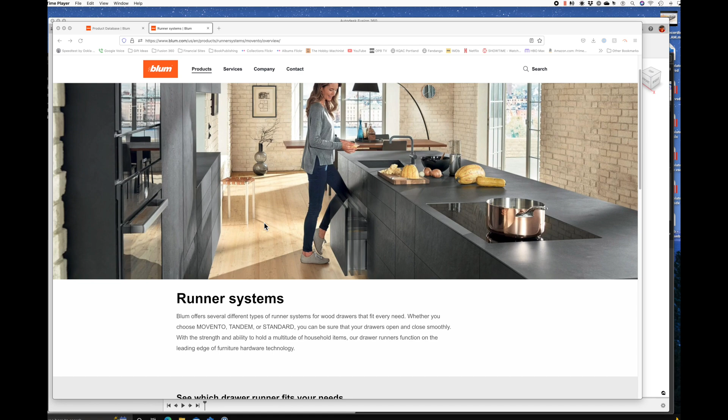Anyway, so let's see what we got here. We're at the Blum website. Let's see if we can find some models for what they call their runner systems. I think we'll concentrate on the Movento system.

So let's go to Services, e-services. They do bury this down in their website. Product database, start the database. Okay, if you don't already have registration with Blum, you're going to have to create one here. It's pretty straightforward. I have an account with them, so let me log in here.

And there we are. Okay, we got scheduled maintenance - that's a ways away. Product database. Here we go. They don't call them drawer slides, they call them runners. Pretty bougie, I guess. There's our Movento. And there's our runner.

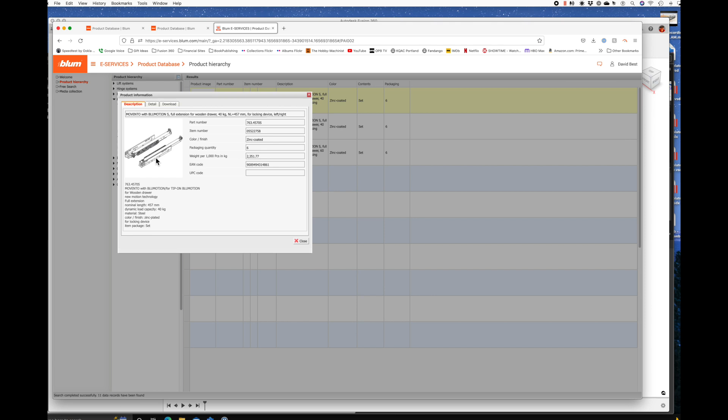And let's put in, there's our 18-inch versions. So we've got a few types here. This is 40 kg full extension. All right, so I'm pretty sure the differences here are the thickness of the drawer box sides. Let's just pick this one here. I've used this before. Okay, that's the runner we want.

Here's the download file. Okay, so there's the CAD stuff. Let's scroll down here and see if we've got STE - that's a step file. We'll download that.

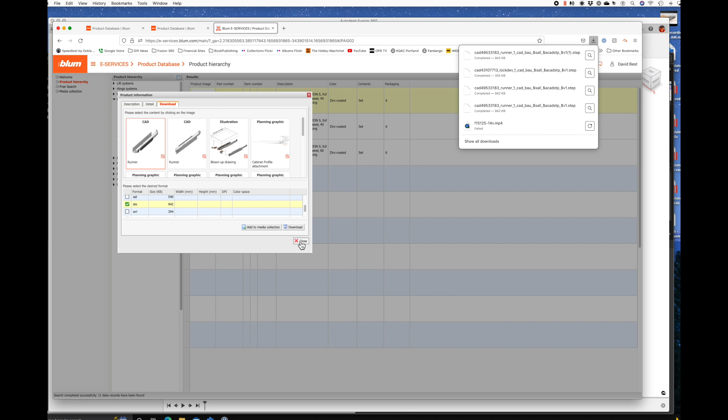And let's close this. We'll go to the download folder and open that from Fusion. So here we're back in Fusion, file open. So we'll go open from my computer, downloads. There it is.

Well, that's interesting. Let's see what we've got here. We've got a solid model. What do we got here for components? We've got two bodies. Is there more than one body in each of those? No. So there's two components with a body in each. Let's see what they are.

Let's turn one off. Okay, that's the runner. And this other piece is, oh, that's the Movento soft close mechanism.

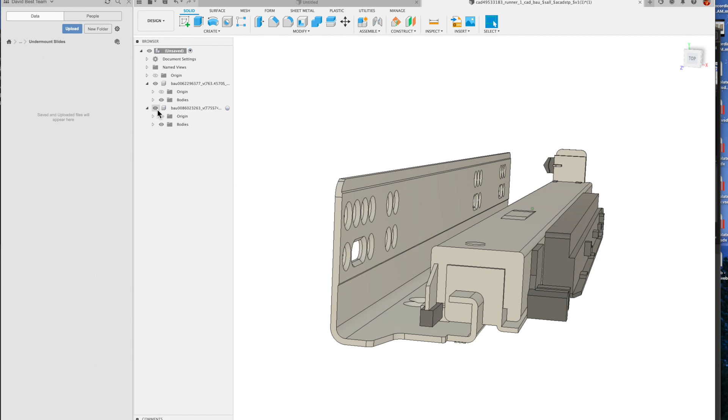So we've got something here. Let's look a little closer. This is, of course, the rail that attaches to the side of the cabinet. This is the back because there's the little tab that sticks in the hole that you have to drill in the back of your drawer box. What we don't have here is the clip that attaches this to the drawer. So we'll have to go back and get that.

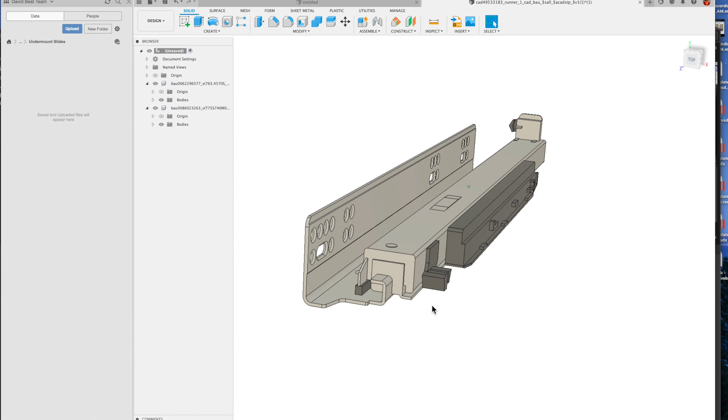Let's close this. But notice something here - they've given us kind of a brick of a model. There aren't any functional components here. I guess Blum must be worried that somebody's going to take a truly accurate 3D model and rip them off or something.

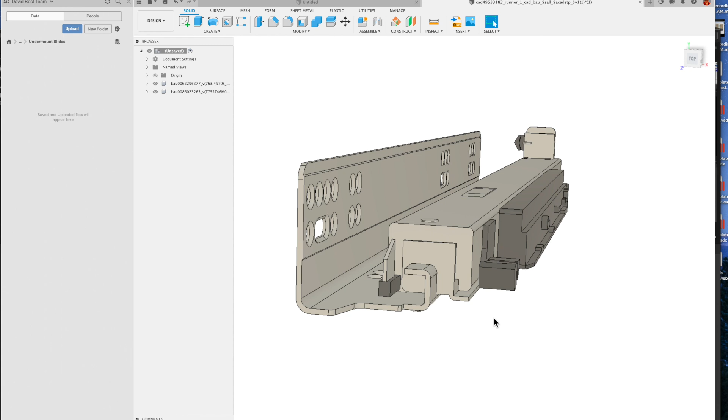But there's at least enough here to build this into a 3D model of a cabinet that uses it. It won't move, it's going to be static, but at least you can get the placement and see it in the model. Let's go back to Blum and see if we can't find the attachment clip that goes along with this.

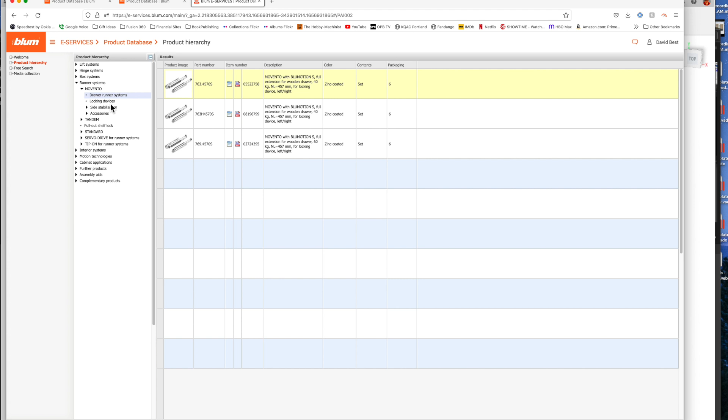So locking device, that's what they call them. There's one there. This is the fancy version that's got 8-way adjustability. What do we got here for downloads? So if we go under the CAD tab, we can scroll down. There's our step file. Let's download that. Okay, that's come in.

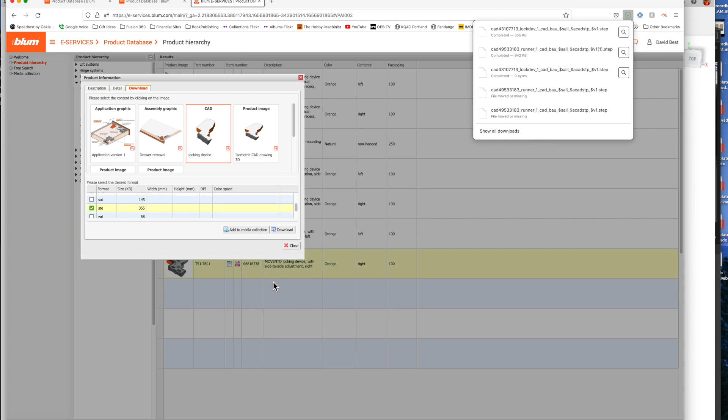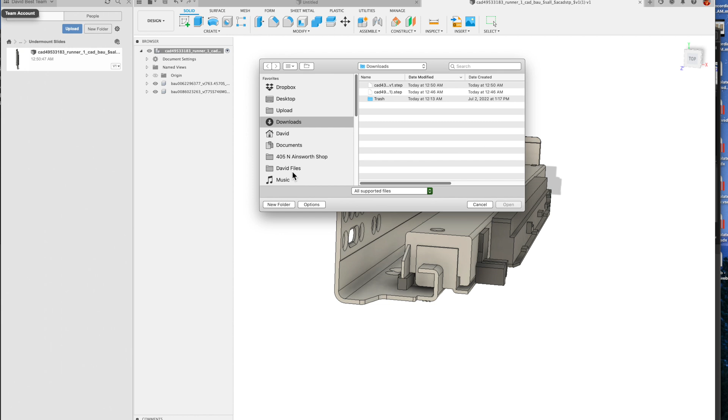Now we can't pull that directly in here. Let's save this first. Okay, that's going off into our Undermount Slides project in the cloud. Now we can open from the downloads folder again. There we go. Woo.

Okay, well it kind of looks like a clip. Not much to it. It's another kind of brick model. So let's save this.

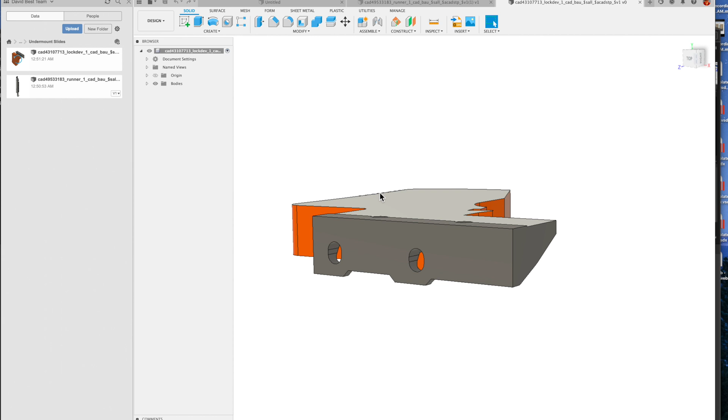Now we've got it over here, and we can import that into this. Let's do that now, let's just bring that in. Insert into current design.

Wait a minute. Oh, I see, I picked the wrong one here. Insert into current design. All right, there it is. I'm not going to pay any attention to that right now. Let's just see what we got.

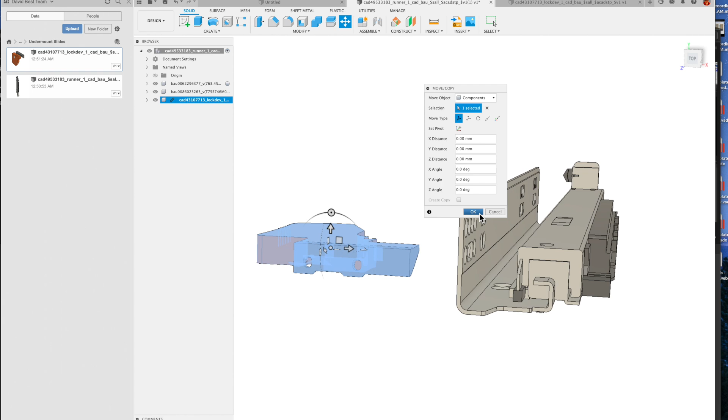Okay, well, that looks functionally correct for the clip. It's got the holes that you screw the clip to the bottom of the drawer box face.

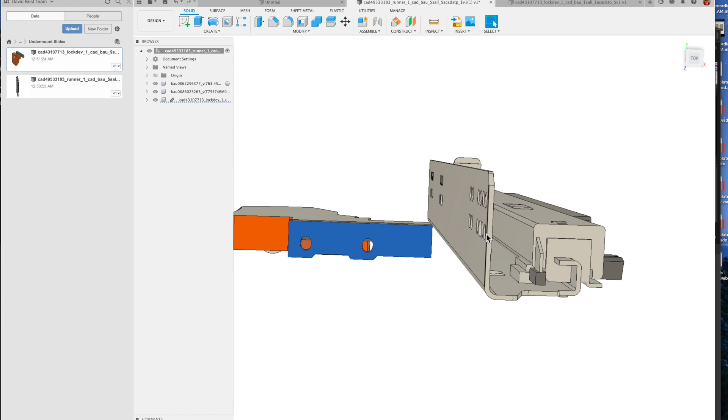Except this is for the right-hand side of the drawer, and this is a left-hand drawer slide. Okay, well, Blum's made it a little bit harder for us here, but we can fix that.

So what we want to do is take this clip and make a reverse copy of it using, under the create thing here, there's a mirror command. We'll use that in a minute.

First, I want to point out something. Since we imported that clip into this runner document, you see that paper clip there? That tells us that this is an imported model from another file. And if we were to go to that other file and modify it and save it, we would get notification in this model that that has changed, and we'd get an option to update it.

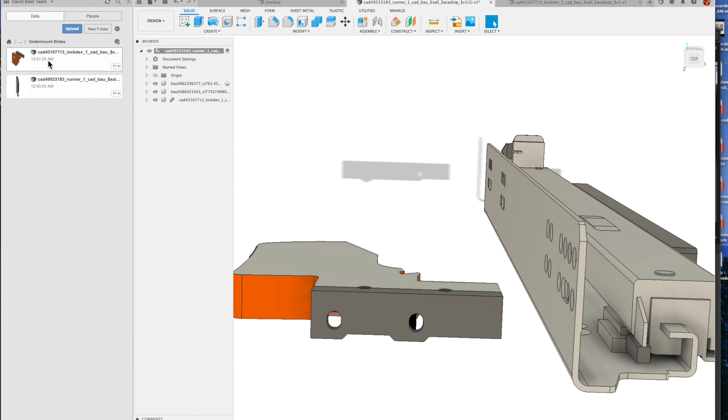So for this purpose, I don't really want to have two separate components here, I just want them both in the same thing. So there's a way to break that linkage between the external model and the model you're currently working on. You right-click on that paper clip, you can break the link right there. So now it's gone, now what we've got in here is completely severed from its relationship with this other saved model. All right, let's get on with making a left-hand clip to go with this unit.

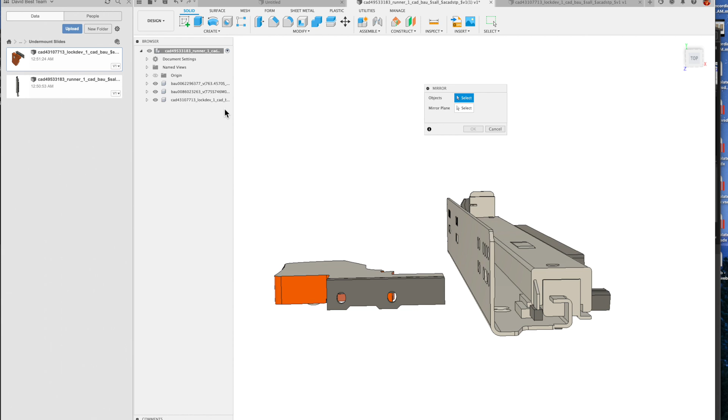So create mirror, and it wants to know what objects we want to mirror. Well, we want this thing, and it wants a mirror plane. So we can select basically any surface here. There we go. Okay, so now we've got two.

And this is a mirrored copy of the first one. So let's get rid of the first one, we can delete that.

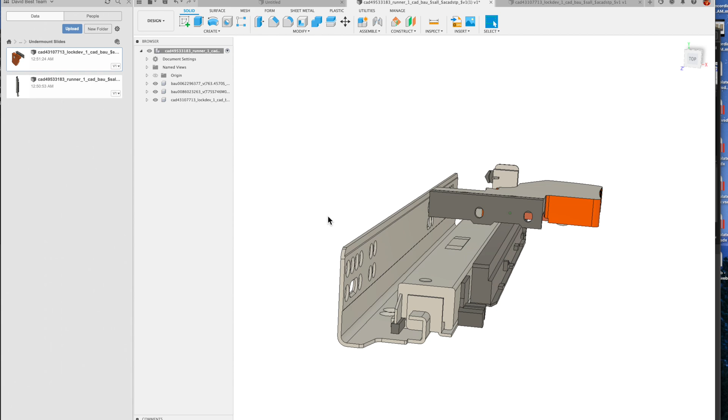Now, we don't have a lot of particulars about how these attach. They haven't included all those details. There's some essence of it, but not a lot.

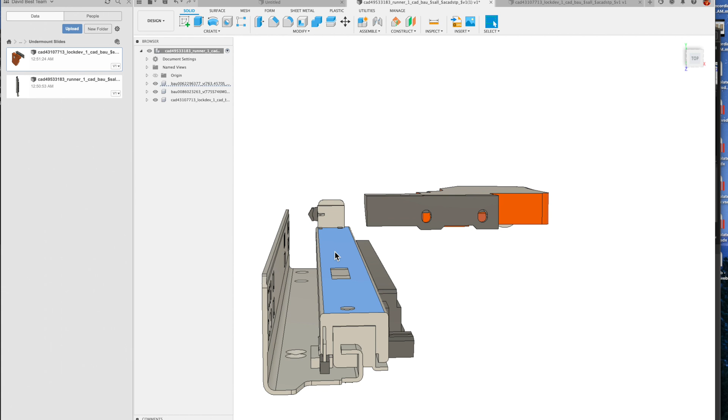I know from experience that we've got some surfaces that are in alignment. The bottom of the drawer bottom sits on this rail, that surface there. The side that hangs down butts up against this surface here, so the drawer slide fits between, or the drawer box side fits in this space in here. So I know that this clip attaches to the underside of the drawer bottom, and it's screwed into the face of the drawer.

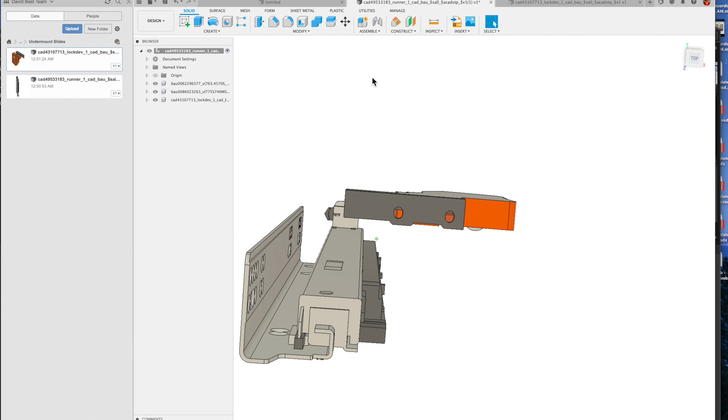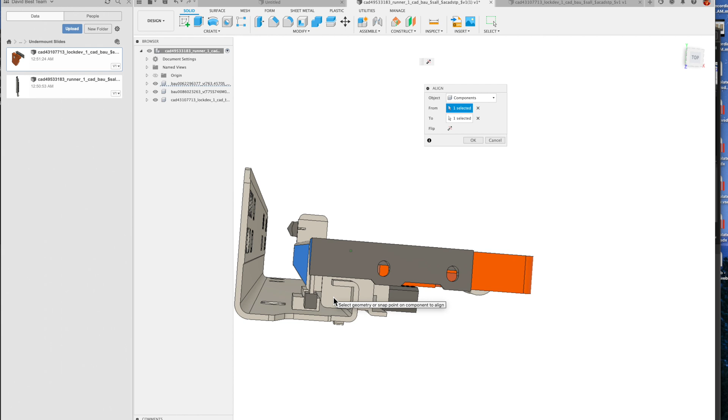So let's start doing some alignments here. We can align this surface with this surface, we know that that's true. This edge of this clip attaches to the bottom of the drawer against the side, so that would be in conform with that surface right there. So I think we're pretty close.

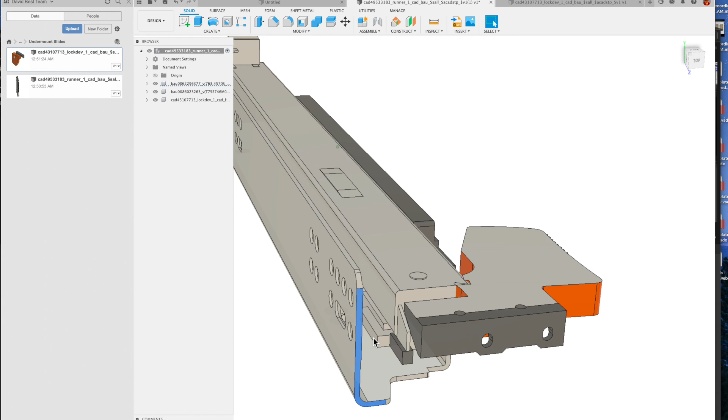What we don't really know is front to back, except I know that the drawer box face aligns with the front rail here from experience. It aligns with that surface when this is all set up, or pretty close to it. And if we look at this from the side, this surface is sitting too far forward because we've got a drawer face that goes there.

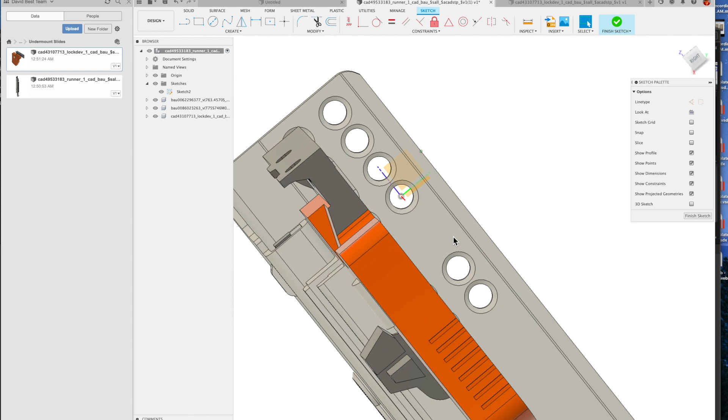How about this? Just for grins, let's do a sketch, and we're going to do it on this surface here. Okay, good. Now, we can pick up surfaces and points and things from the other geometry that we're going to use to create this sketch.

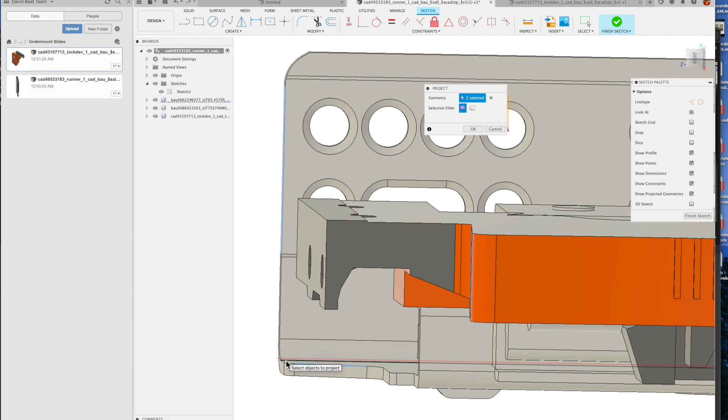So let's hit P for project, and I want this surface here, I want the front edge of that. Maybe, what else would be good here? That line right there, yeah, that's probably okay. And now we can do a rectangle for the drawer face.

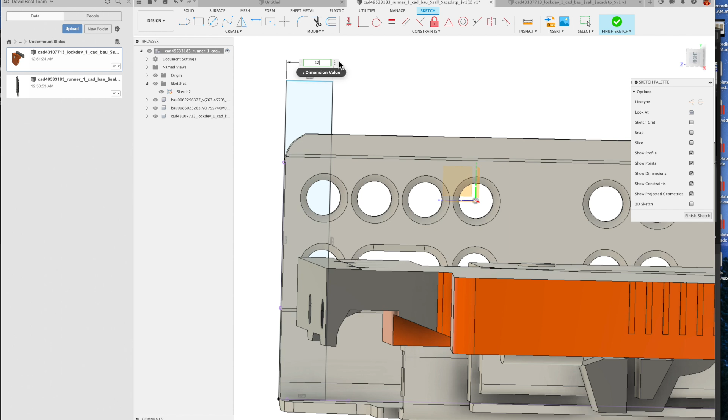There we go. We know this probably wants a 12 millimeter. Drawer box fronts and sides. There we go. Okay, we can finish that sketch. Now we can extrude that.

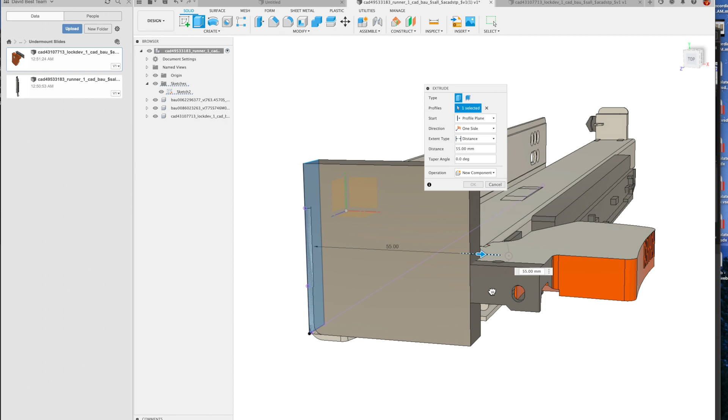And we're going to create a new component out of it, that way we can turn it on and off and the like. So that's kind of our pretend drawer face. I think that's probably pretty close.

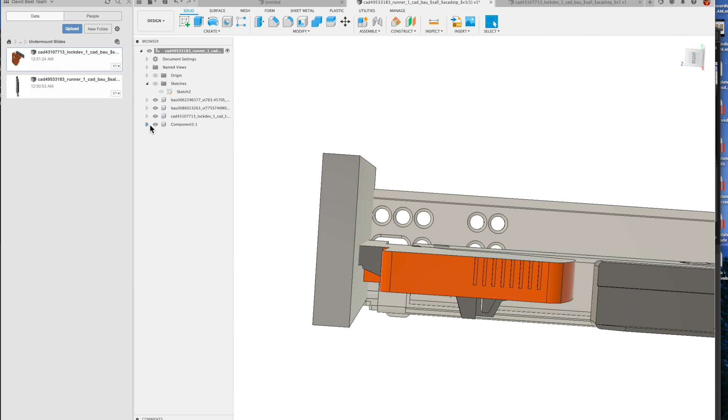We'll get rid of that in a minute. We can turn that sketch off, we don't need that, we don't need the origin for reference anymore. So what we want to do is align the front of this clip with the back of that drawer face. So let's do that. Align this surface.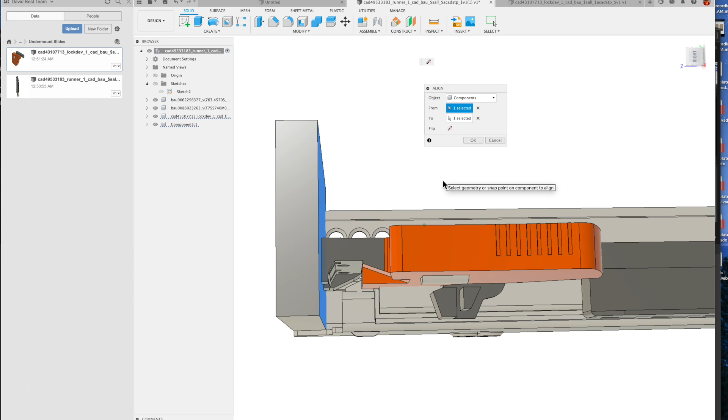We'll turn the drawer face back on and specify that. Okay, that's probably pretty close. I can believe that. I think if I was going to get any more serious about this, I'd call Blum, or I might do a more serious sketch about all this.

But there we are. Let's turn that off. We can actually delete it, we don't need it anymore. So that's probably the proper relationship between the clip and the runner.

So let's do a couple housekeeping things here, and we'll save this away for use in another model. First thing we want to do is assemble it into a rigid group again. So here we go, assemble rigid group, and it wants to know the components, so we'll select all three of these things.

Okay, now it'd be nice if this came in as one complete package rather than 3 individual components when we actually insert it into some other design. So let's right click here, create a new component. We can give this a name, Blum.

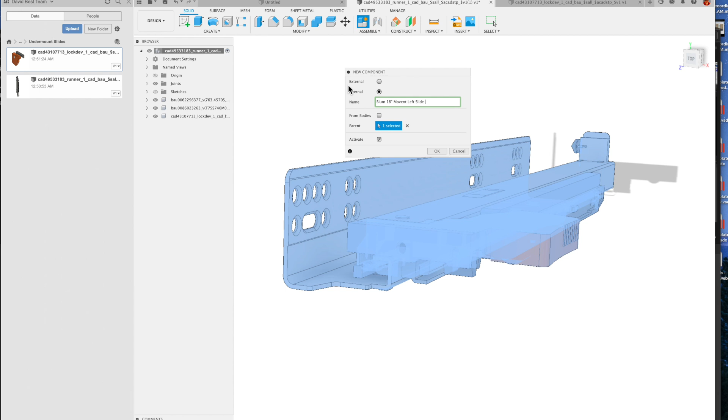This was an 18-inch Movento left slide and clip. How about that? So there's our new component.

Let's put the other 3 into it just by clicking on them and dragging them in. There we go, we can save this now. And this is going to update over here.

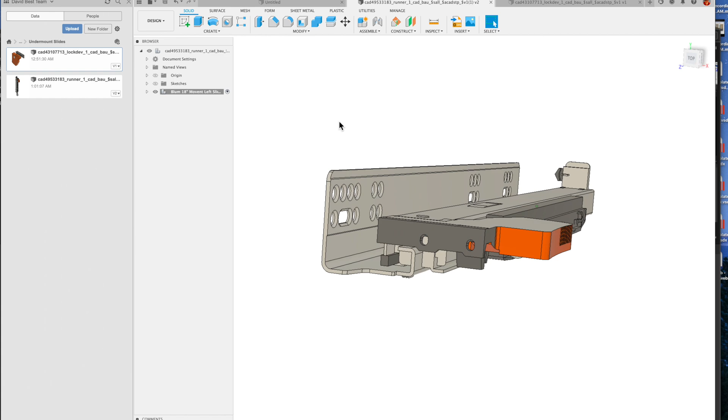There we are, so we've created a static Blum undermount for the left-hand side, including the clip. And we can bring that into a cabinet model and use that for placing and for illustration purposes if you wanted to do a rendering for a customer or something. So there we are. But before we do,

we have a pretty odd name for this component over here in our data panel. We can change that name. If we click on this little V2 thing here, we right click on it, we can rename it.

That's the only way you can rename it other than going to the web storage location where all this is kept in the cloud. So we can call this Blum Movento 18-inch left with clip. There we are.

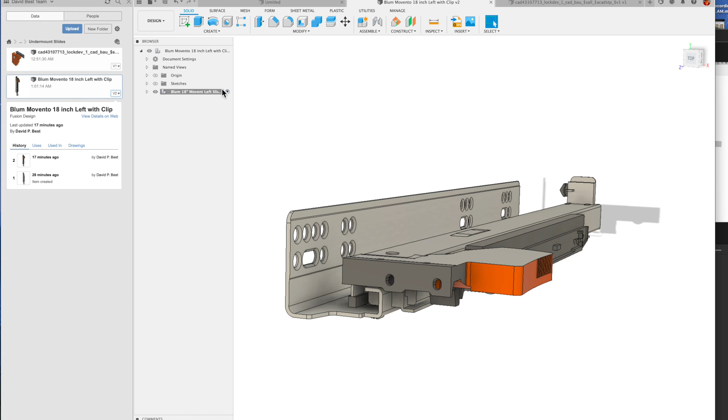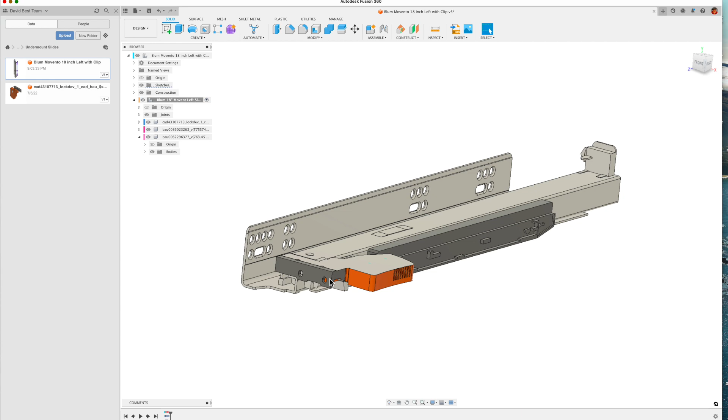So now that's stored away and that's a little more friendly than the internal CAD numbering system at the Blum website. Well, I want to do one other thing here before we move on to some other slide. I'd really like to get this into a functional model, at least partially, so that the metal frame that is screwed into the cabinet stays stationary and the runner system here that's under the drawer actually operates, moves in and out. So I'm going to tackle that here.

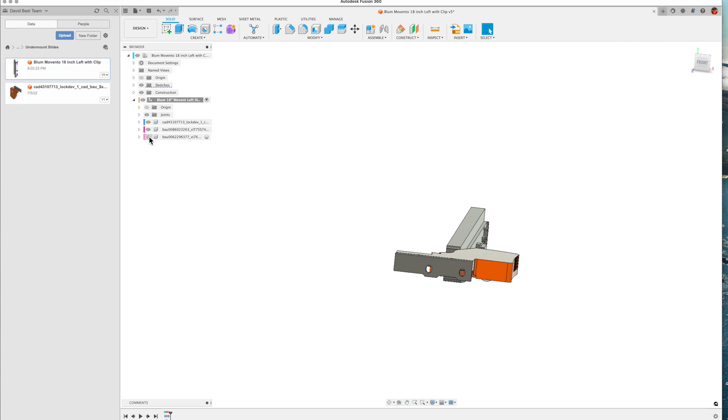Let's see what we've got for components here first. That's the main body there. This thing here sits on the side of it, that's fine. And this is the clip.

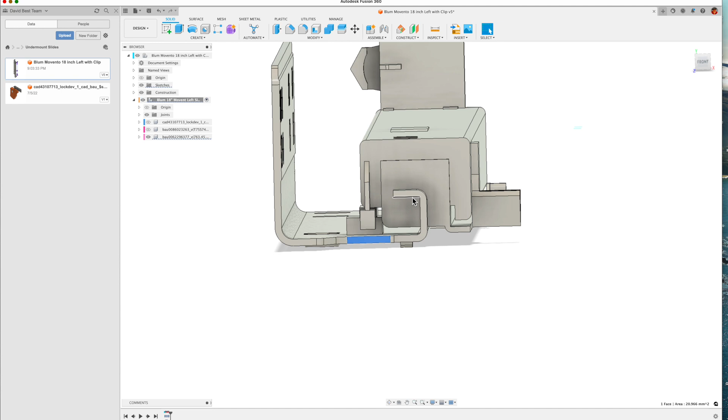So this is the thing that we want to try and separate. This is the mechanism that slides along. And this part right here, all of these things, that's the metal frame that this component slides along and is controlled by. So what we really want to do is separate most of this stuff here from this metal frame that bends around here.

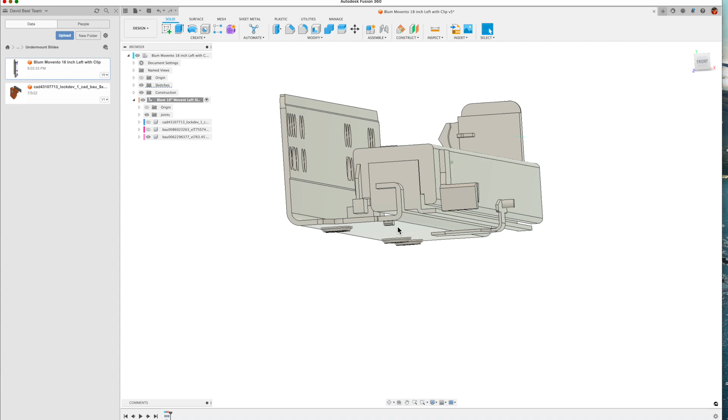Now we've got some other components here that are part of that metal frame. Little feet on the bottom. Not exactly sure what that is. But let's see what we can do here. Basically, we want to split this. So what's in here? We have one body, and we want to make it 2. All right, so let's do this.

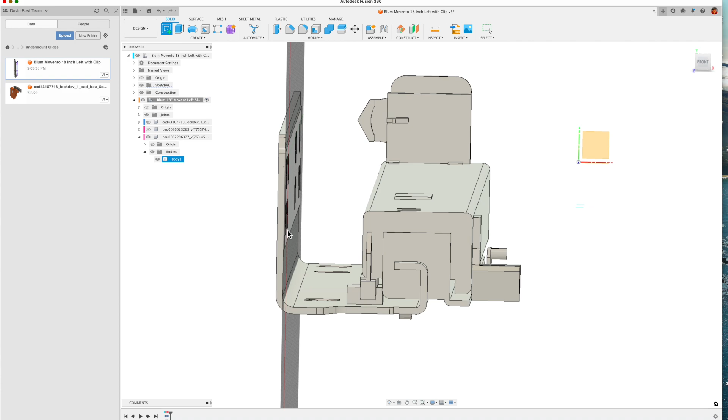Let's create a sketch. We're going to create some sketch geometry here on this face. Let's see, right there. We'll get this up here where we can see it a little better. And the sketch geometry that we want includes this.

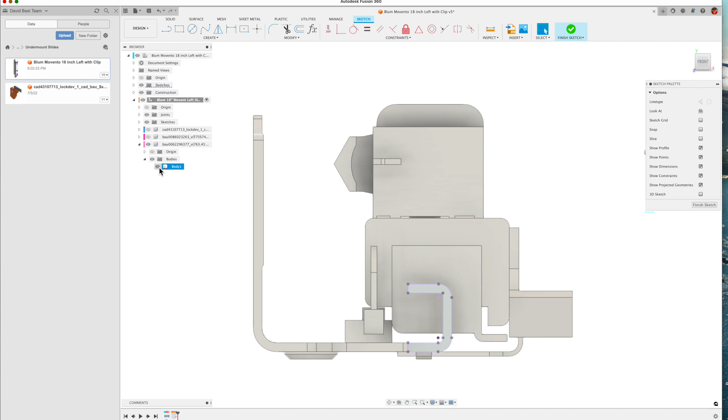So let's do this. Let's do a projection of that. So we got that. Let's turn off our body now so we can deal with this.

So those are projection lines. I want that turned into real sketch geometry. The way you do that is you select whatever projection line you want, as you can see I just moused over the whole thing here. And if you right click on it, we should get something called break link.

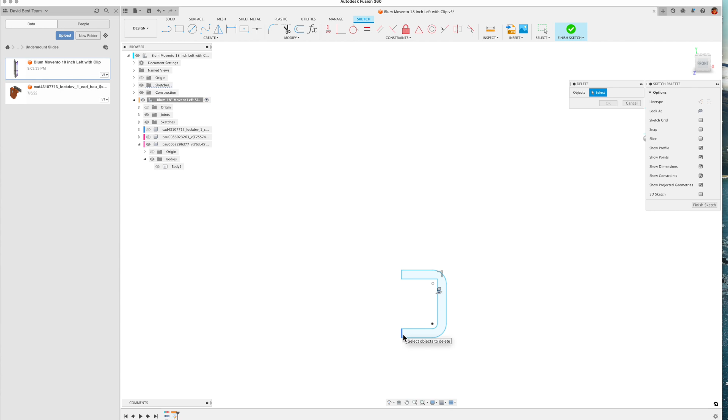Okay, so now those projection lines onto the sketch plane have been converted into real lines, so we can start manipulating it. One of the things I want to do is extend this outward here. So let's first right click and delete this little piece right here. Say OK. Now I want to add some extension lines. Let's just bring this out here. We'll come down and pick up that point there and come across.

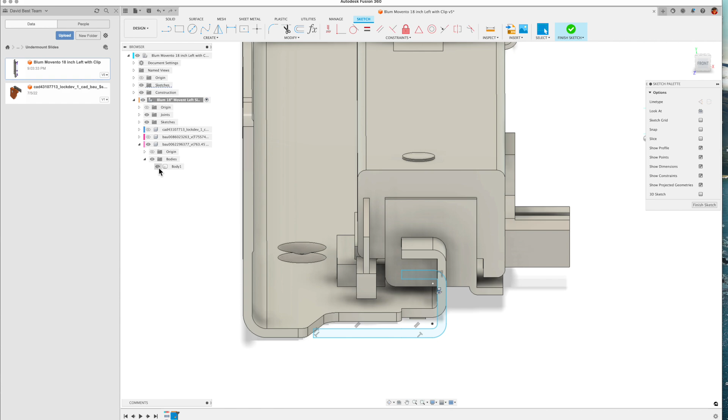And we're done. Now let's turn on the body and see how that looks. Yeah, that ought to get everything over here separated. We're going to end up with more components than we want here in the end, but at least we've got some sketch geometry that we can use to split this body.

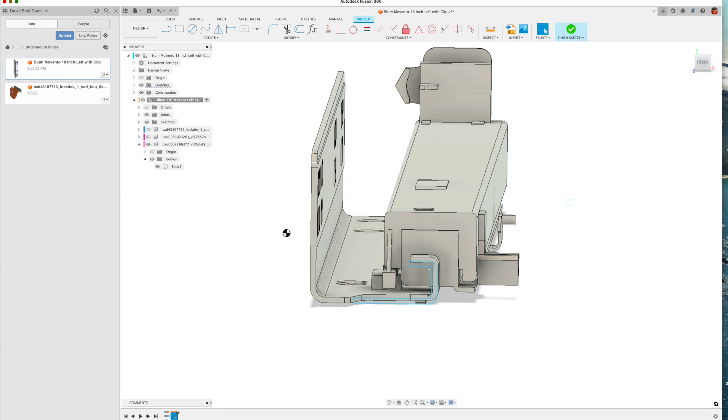So we're going to finish our sketch. And the next thing we're going to do is split that body. So the command is right here, split body. And we can specify the body that we want to split. That's this one right here. Let's turn it off.

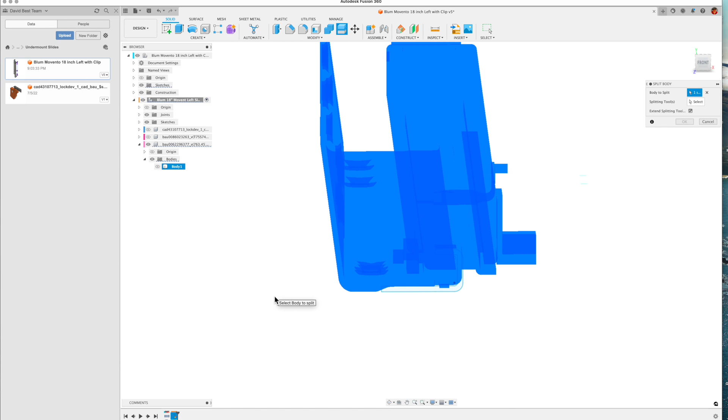Actually, let's do this the other way around, it'll be easier. So I just deselected that body. Let's select the splitting tool first, I'll just mouse over that whole thing. And then we'll select the body, we'll turn it back on. And select that body. There we go.

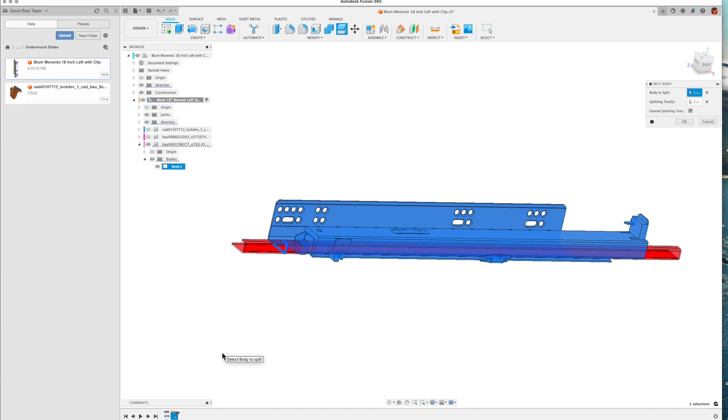So those red lines are split body profiles. So let's just do that and see what we end up with here. Okay, well, we got a bunch of other bodies, that's for sure. Let's turn off this sketch, we don't need that. What do we got here?

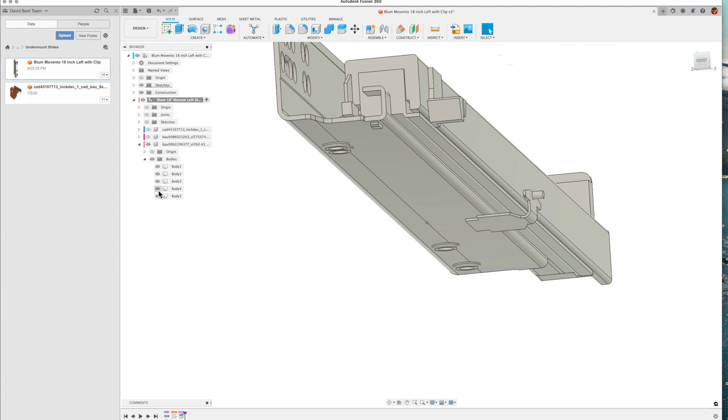Okay, there's the main rail that goes on the side of the cabinet. There's that piece on that hangs off the bottom. That's part of the metal component that's affixed in place. There's that little tab we were worried about earlier, you can see that turning on and off. There's our mechanism that slides.

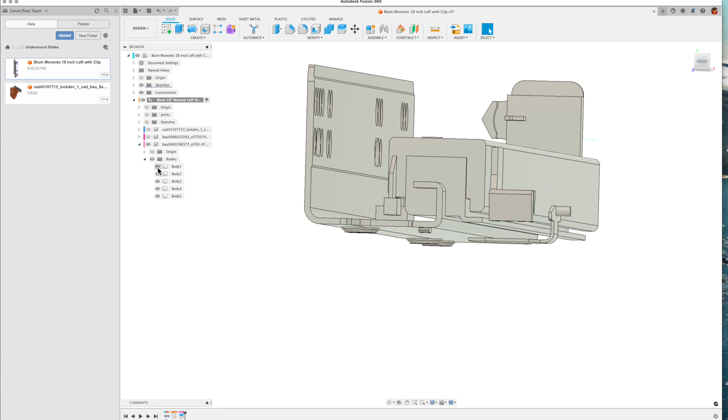And what is this? Okay, that's part of the metal fabrication component. So this is the sliding component right here.

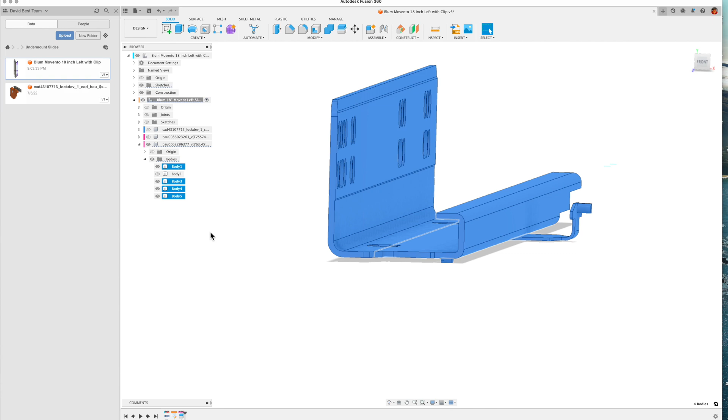So let's just take everything that's left. I'm going to click on that. I'm going to go Shift, click. I don't want, no, I'm going to click on that. I'm going to do Command click and select these three elements, that's that whole metal structure. And I'm going to say, what do I want to say here? Combine. There we are. Now we've got kind of a complicated toolbox up here.

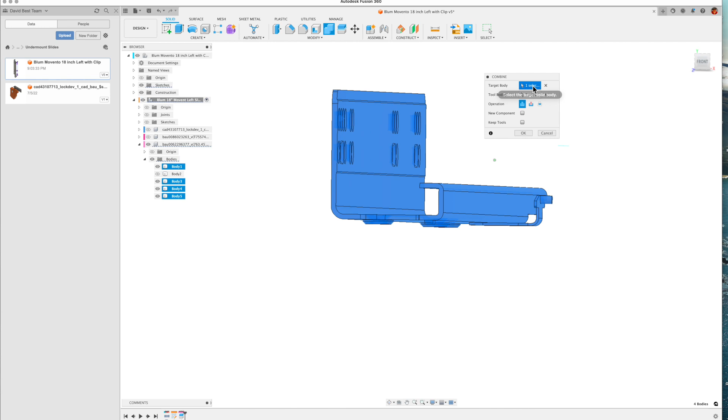The bodies we want to connect are those three, here four, with this one with those other three. So we'll just do that. All right, so we now have one body that represents that entire metal structure that goes into the cabinet and is bolted to the cabinet side, and then we have this mechanism here that slides along it. It's not precisely the mechanism that Blum supplies, but it's a close approximation of it.

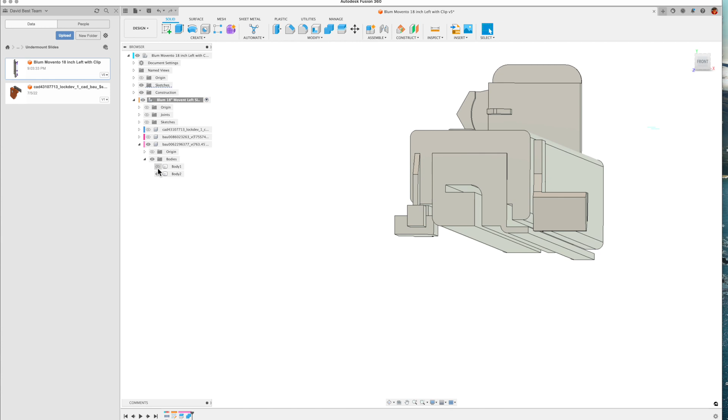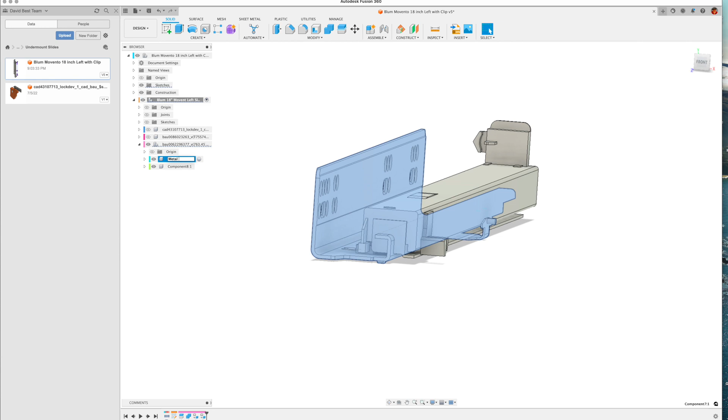I think what I want to do at this point is convert these bodies into components. So let's do that, let's right click on that, create components from bodies. Right click on that, create components from bodies. Okay, so let's call this one the metal rail, and let's call this one the runner.

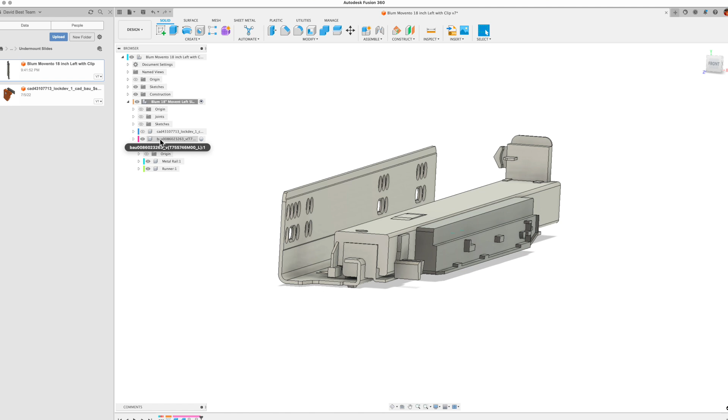So good. Okay, well, as long as we're naming things, let's put some names on these other pieces here so we know what they are. I don't actually know what that is, but we'll just call it the side block.

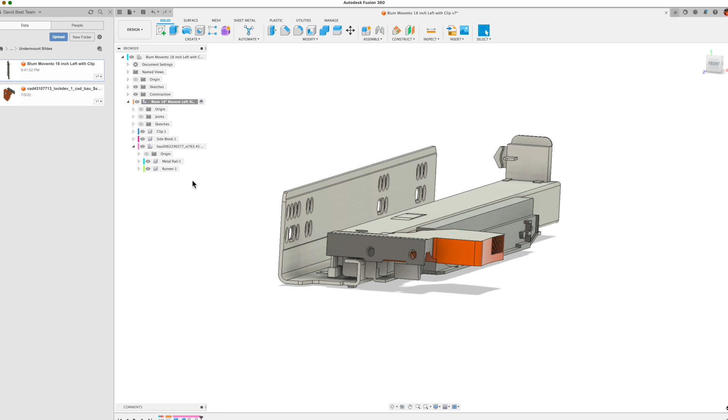We know this is the clip, so we'll call that clip. Now I want to go forward here and set up a joint so that these three components here actually move along on that runner component.

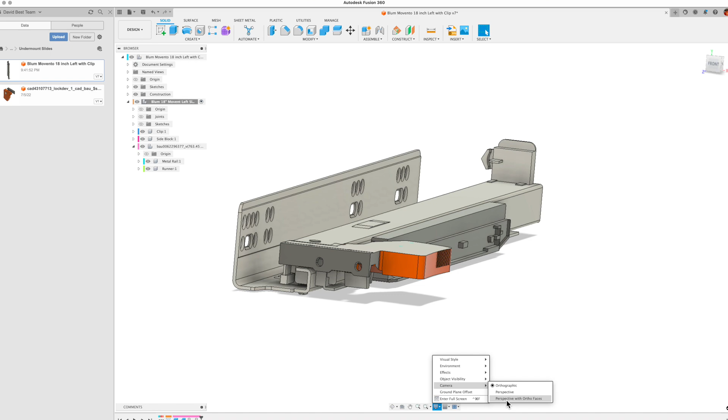I'm looking at this and thinking it looks kind of weird. I've probably got the camera in the wrong spot. It's in orthographic. Let's make it a perspective with ortho faces. How about that? That looks a little better to me, it's got some perspective to it.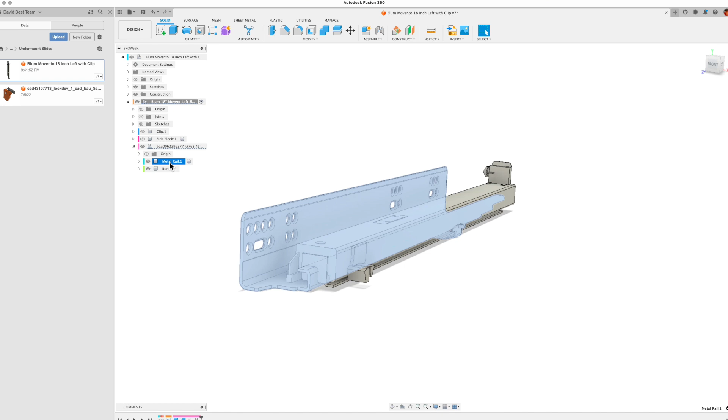Okay, let's turn off these two pieces for now, and what I want to do is create a joint relationship between this component here, the runner, and this component here, the rail. We're going to use a joint command to do that, using this face and a point on it in reference to this face and a point on it for establishing the joint relationship.

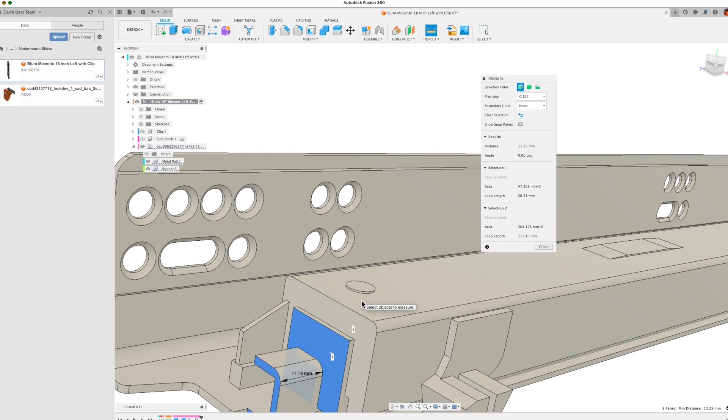So I want to know what this setback is from here to here. I'll press I on the keyboard for inspect. Let's measure the distance from that face to that face. And as you can see, sorry about that, 11.15. We've got it right over here. I'm going to make a note of that because we're going to use it in the joint relationship.

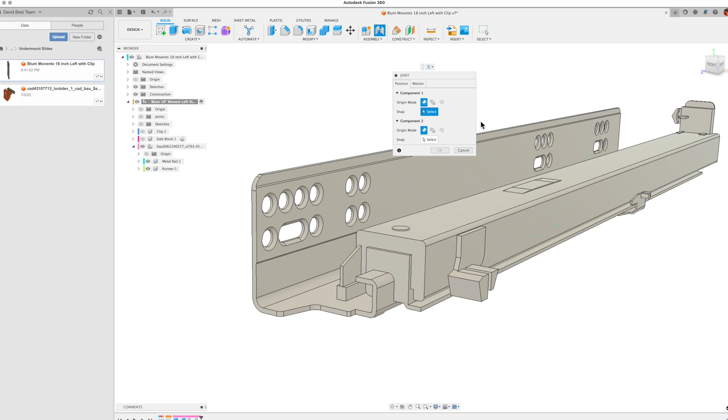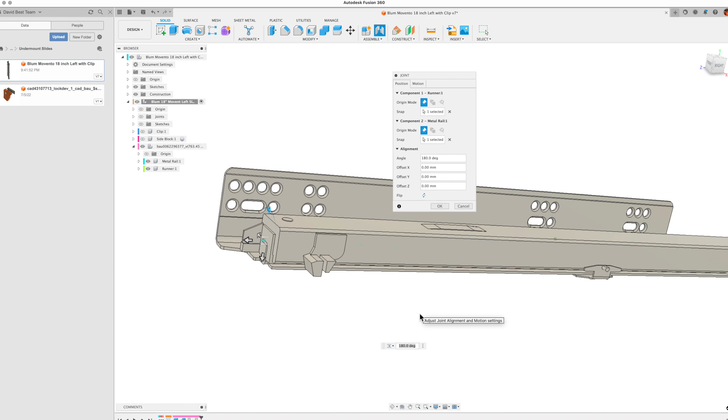All right, so we're going to make a joint. We've got lots of motion opportunities here. We're going to use the slider motion, and let's pick our first component. We're going to say this face at that point right there is going to move against this face at that point right there. Now, for some reason, it flipped it over. Let's unflip it.

You'll notice that it's put those faces right against each other here, and they're not - they're 11.15 millimeters back. So we know that's on the Z offset because we moved it there. Let's specify minus 11.15. All right, so that's where it starts out, and we've got a slider.

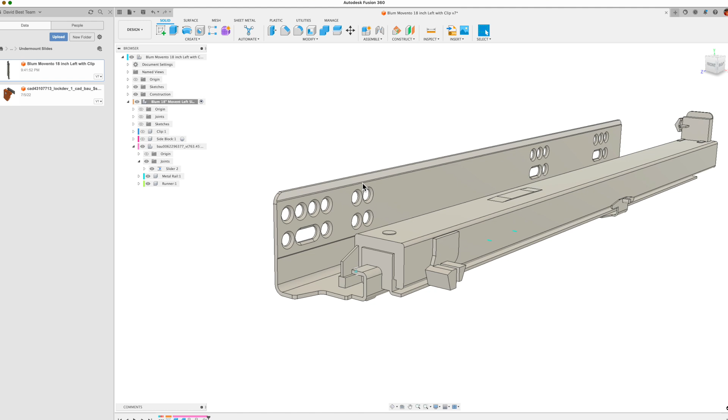Let's do this. Let's ground the metal rail. That way we know it's fixed in space, and we can see that we've got a slider here. We could also animate the joint - that looks pretty good. Okay, escape to stop the animation.

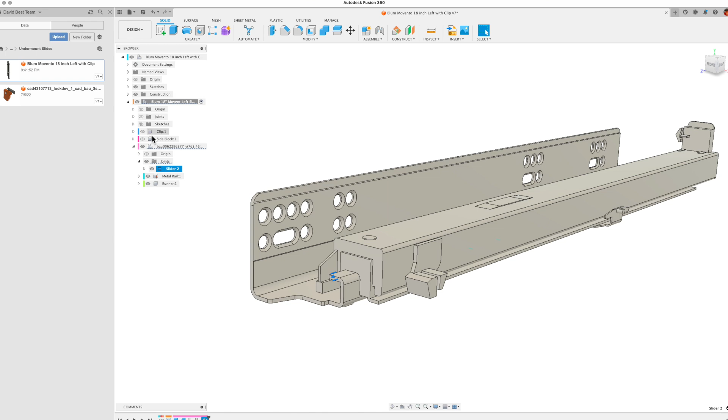Now I want to attach these other components here to that. We know that this thing here is attached to the runner, so we can assemble that. Let's create just an as-built joint between this guy and this guy, and it's a rigid joint. That's good. Let's turn on our clip, and let's make an as-built joint between the clip and the runner. Rigid again.

Now we should be able to - since the metal rail is grounded, we know that because it's got that little orange push pin in it right there, you can see that - let's just see. Yeah, there we go. Now I want to go back to the original position here. Capture position.

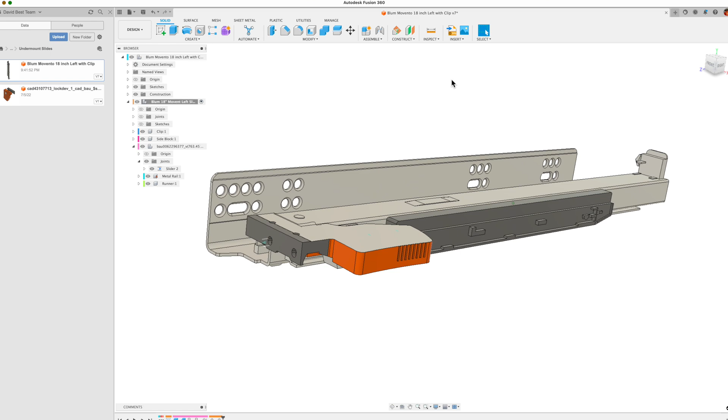Oops, that's not what I wanted to do. Let's revert the position. There we go. I Control Z'd out of that, and we come back to revert position. So this is where the components rest when the slide is collapsed.

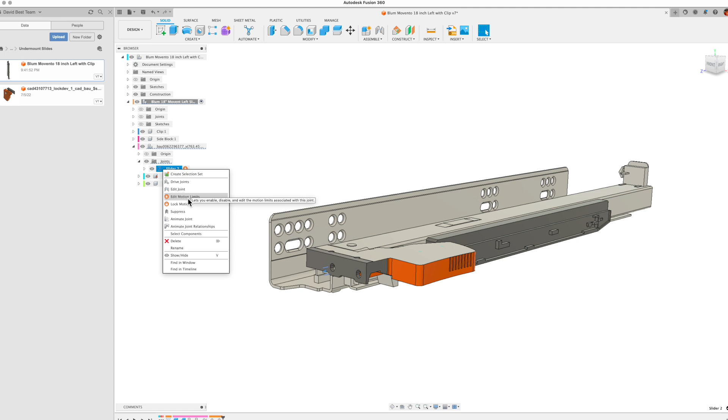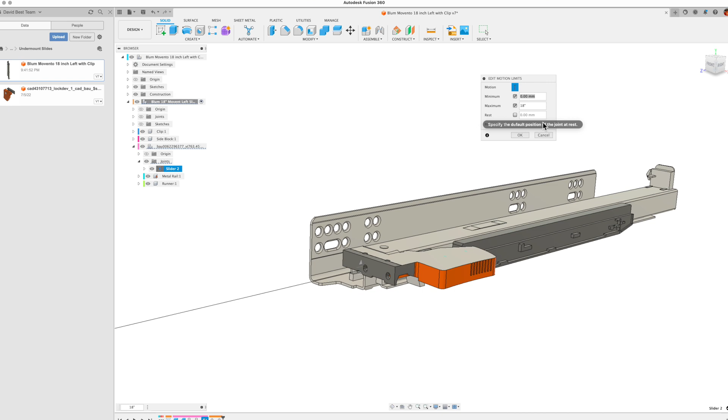Now we want to establish some kind of relationship here on this slider mechanism. We want to edit the joint limits, so let's see what happens when we put in some numbers. This is supposed to be an 18-inch slide, so we can specify 18 inches here maybe, and 0 for that. Let's see, looks good?

Not sure it comes out to 18 inches - probably more like 16 or 15. Let's edit those limits and make it, how about 16? We could look that up.

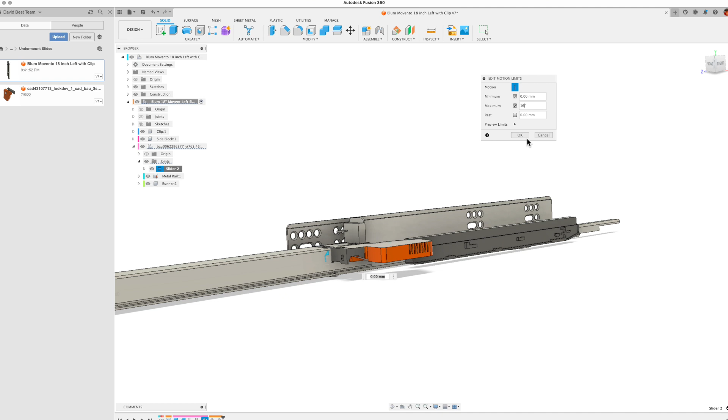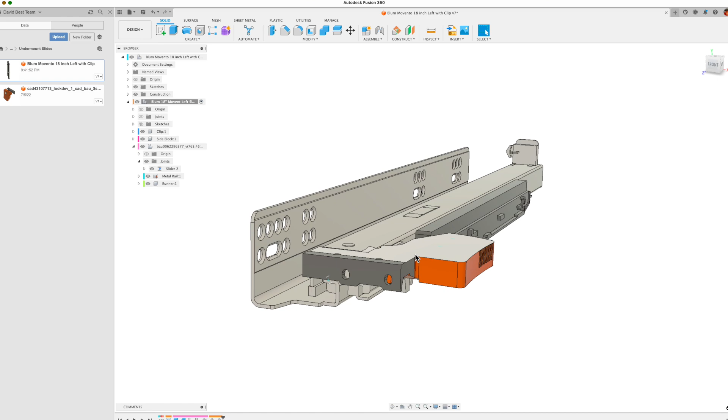So now we've got a Blum Undermount slide for the left-hand side with the clip that's separated. We could remove that joint between the clip and the runner if we wanted to use this in a model with actual drawer fronts and attach the clip to the front of the drawer. But I think we've got a functional undermount slide here, and I know that was a lot of work. It's not precisely the geometry of all the components that Blum supplies, but in terms of the outside dimensions it is correct, assuming the Blum model we downloaded is correct. Anyway, that's how you'd go about splitting those components. I hope that was helpful.

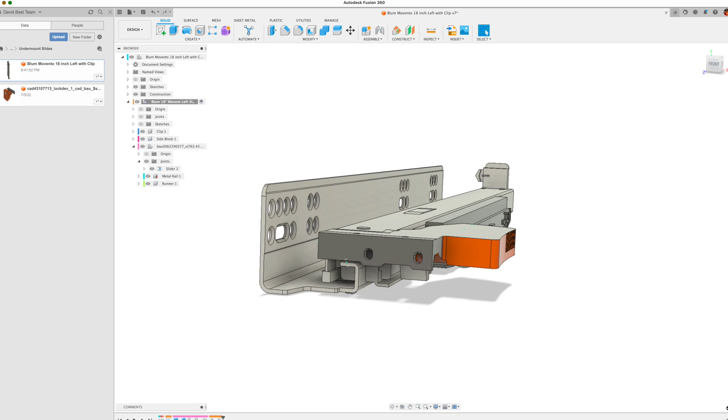Of course, if we wanted to make a copy of this for the other side, we could do that with a mirror command. I'm not going to do that here, but when we get into putting this into a cabinet, we could do that pretty simply. Anyway, I hope you enjoyed. Thanks for watching.